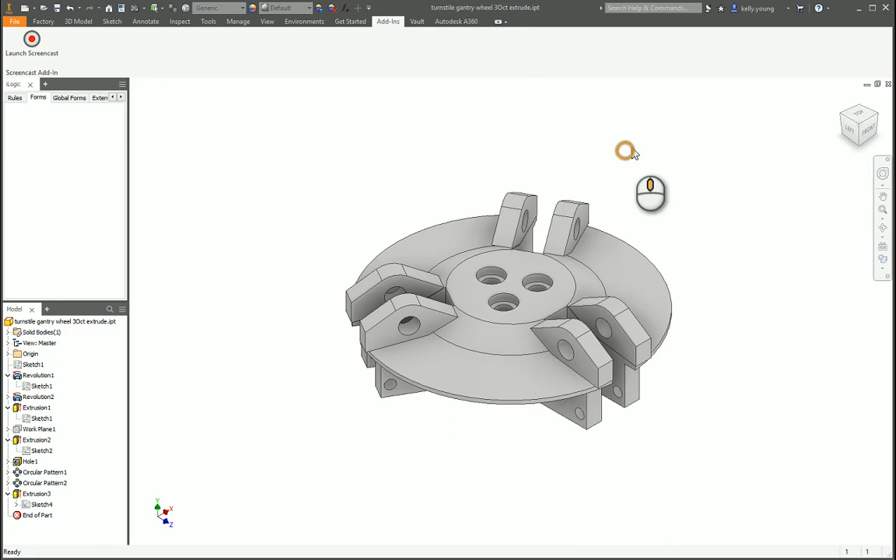First off, if we hit the home button, it's at a weird angle. So let's set it up so when we come to home, it's always set. Right click, set to current, fit to view. That way, if we're crazy over here, F6 brings us back out.

Alright, looks like we got a good start, but there's a couple things I noticed. First off, you did an extrusion on a curved face, so basically it doesn't line up right here. A couple issues with that. Another thing, looks like a couple sketches are unconstrained, like this one. Actually, it is fully constrained.

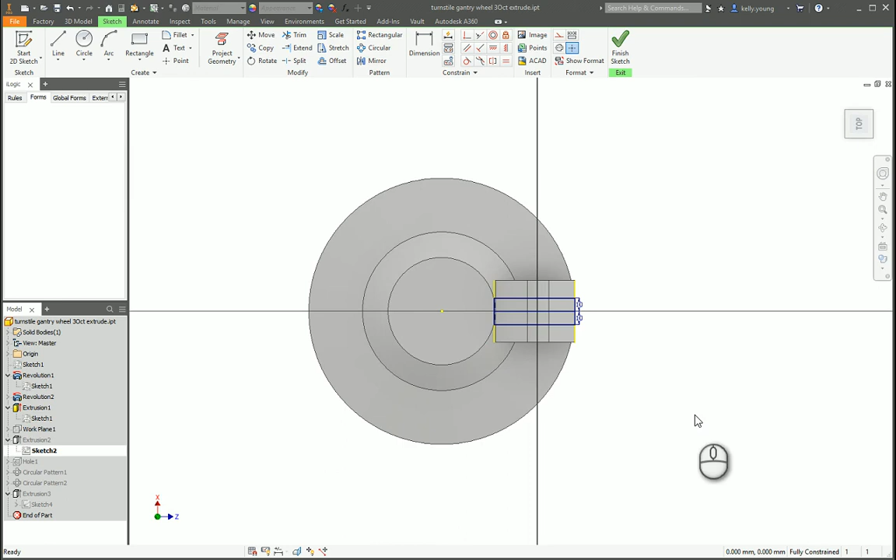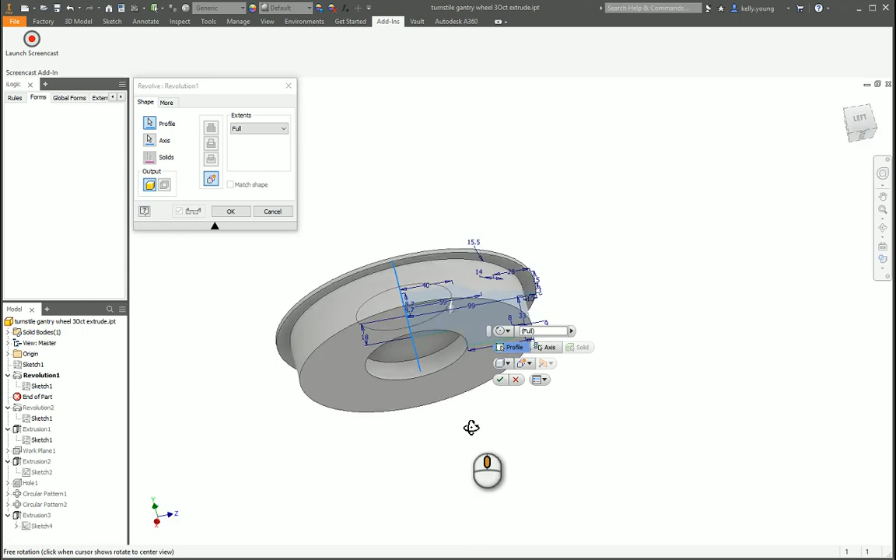I'm going to drag the end of the part up to here. First off, not sure why we're not extruding or revolving this one in this command as well. For instance, we're selecting this. We can select this profile and that profile as well, and get them all done at once rather than having multiple different things going on.

So if we drag this down, it'll give us an error, but then we can delete this one because we don't need it anymore. Okay, so coming down to here, that's really not what we're trying to do. So we're just going to delete that, and delete that one too.

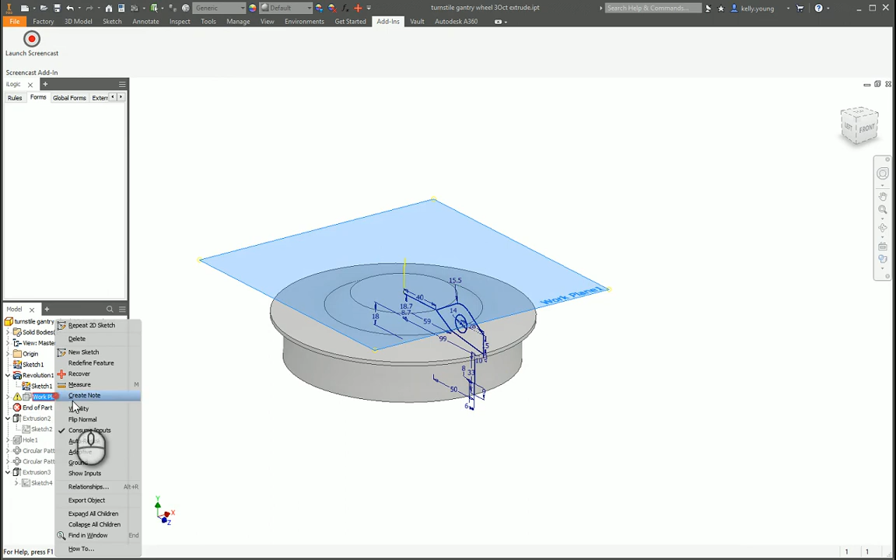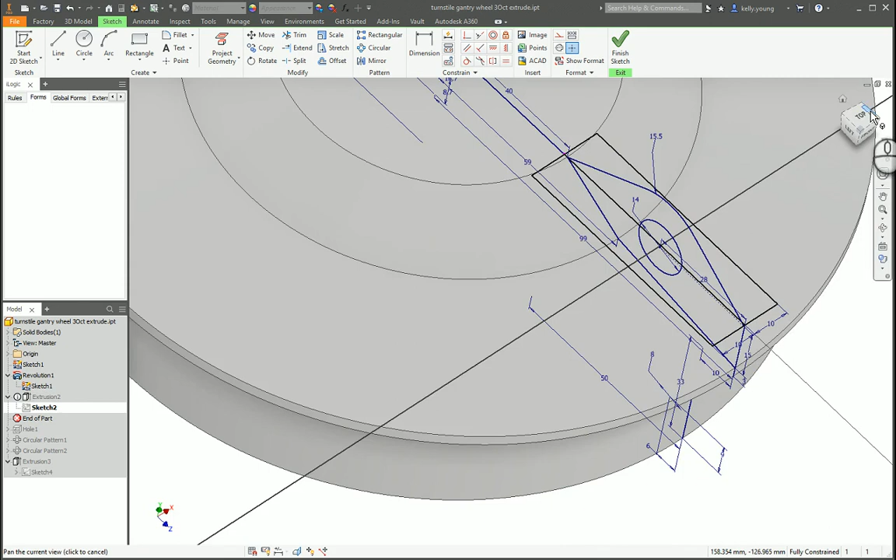Let's just go on. Okay, so we're going to redefine this to our top. So that's basically just cutting through here. Get rid of these. Okay, there's my point there.

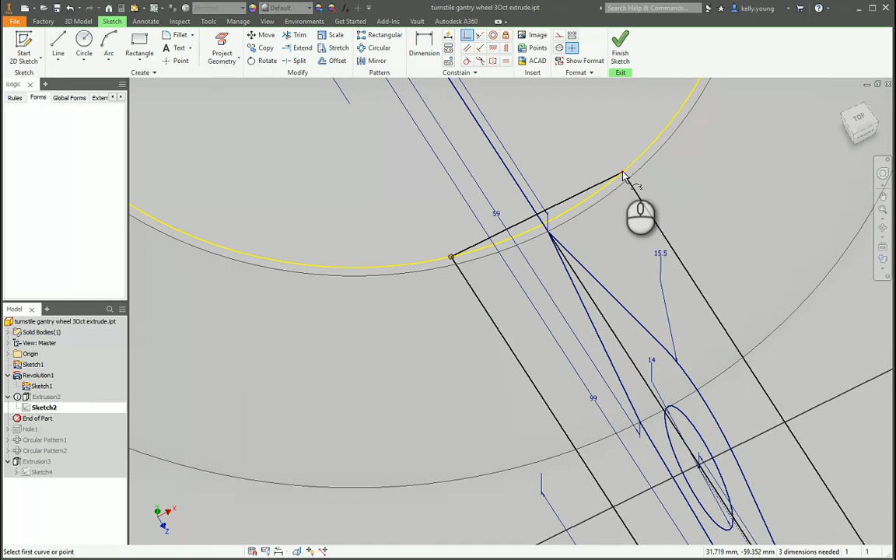So if we project the geometry, I believe it's the bottom one that we're actually wanting. Do a coincident constraint to here, to there, and they'll stick. Now this one comes up and down. Let's call these two in line.

Project the geometry of the outside edge. That point to here, fully constrained. Now you can notice that if it did cut, it would miss that little point, so it did it wrong. Instead, let's do a tangent constraint to the outside, so that way it'll cut all the way through.

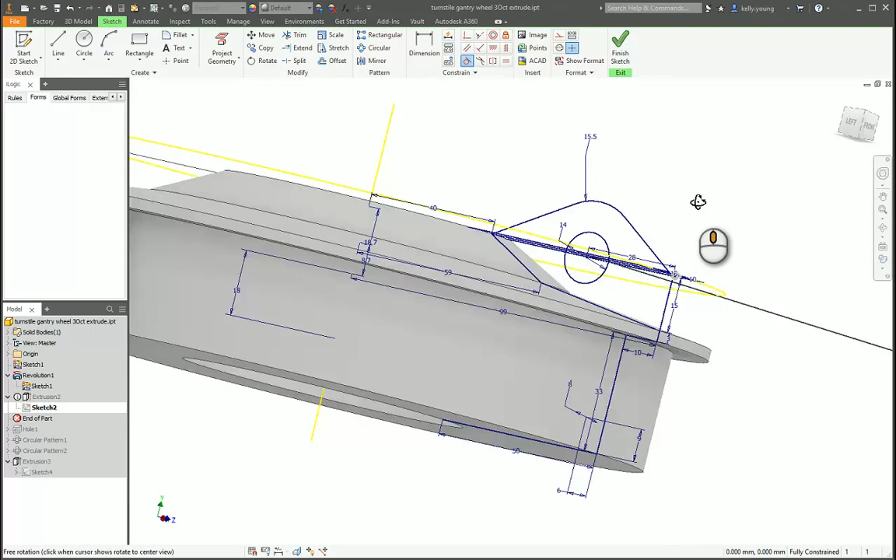Two random lines, make these parallel to each other, trim, make these two equal to each other, and whatever distance we want. Let's call that 12. I don't know what that is. But...

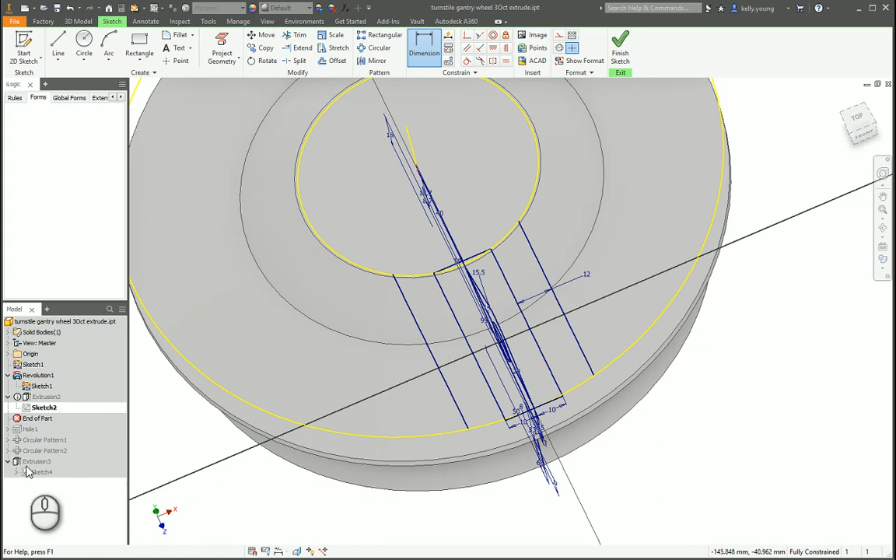So already I realized I did something wrong. Oh no, just kidding.

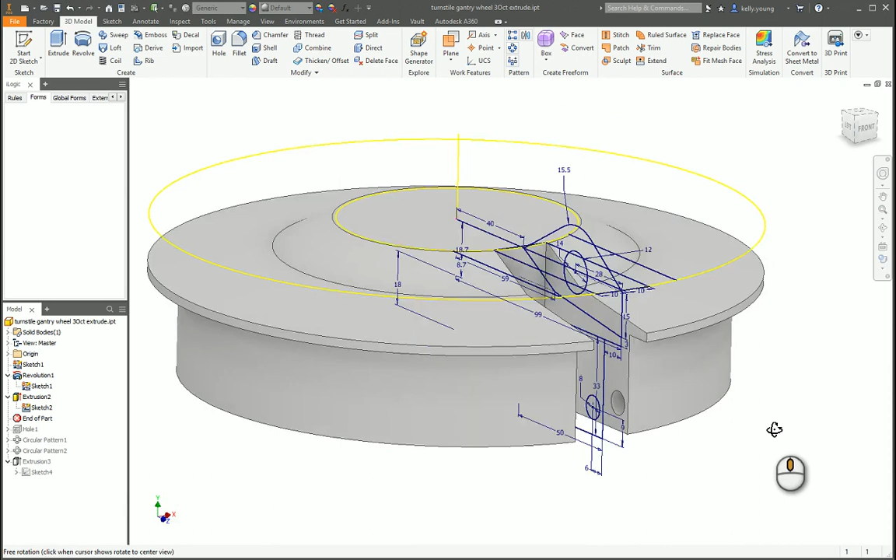So what we're going to do is turn on the visibility of this sketch. Make a plane on that line to this face, so basically it puts it at 90 degrees. If you wanted it flat, you could do it at 0, but we're going to do it at 90. We're going to make another one, same thing.

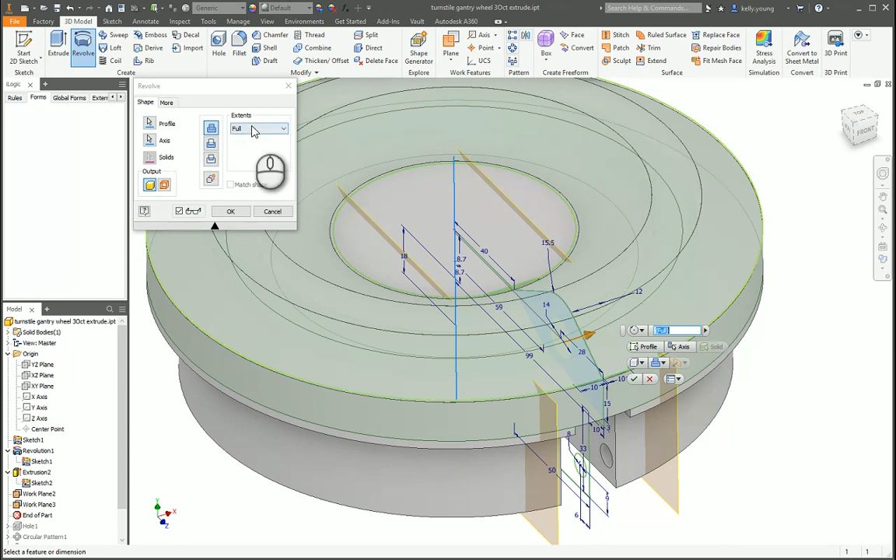So we can then revolve from this along the center line, or you can go to the origin and find the center line through there, but this will work. Between here and here, so it basically comes in between them.

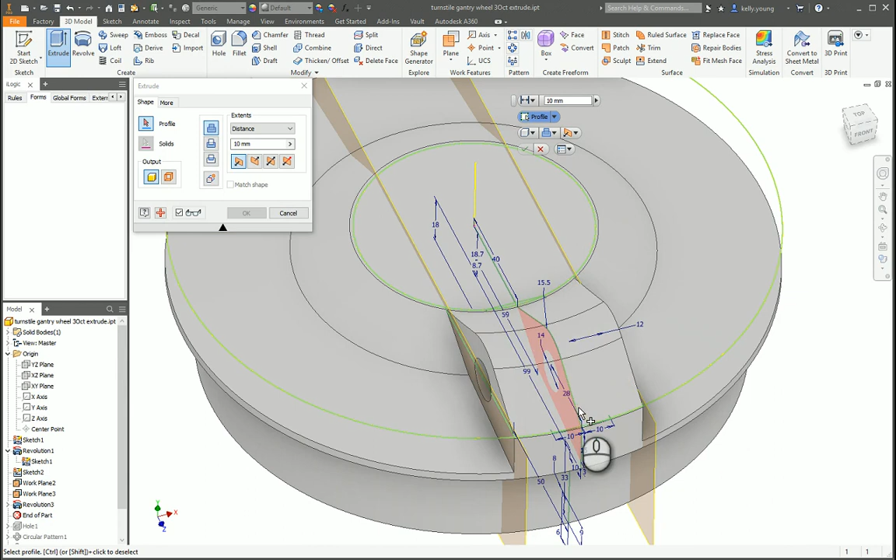Now this extrusion, delete that, because we can come back through and still... where are you? Right click, select other, and then you can basically go through. So I want that guy. Right click, select other, and that guy. I'll give you all the available options.

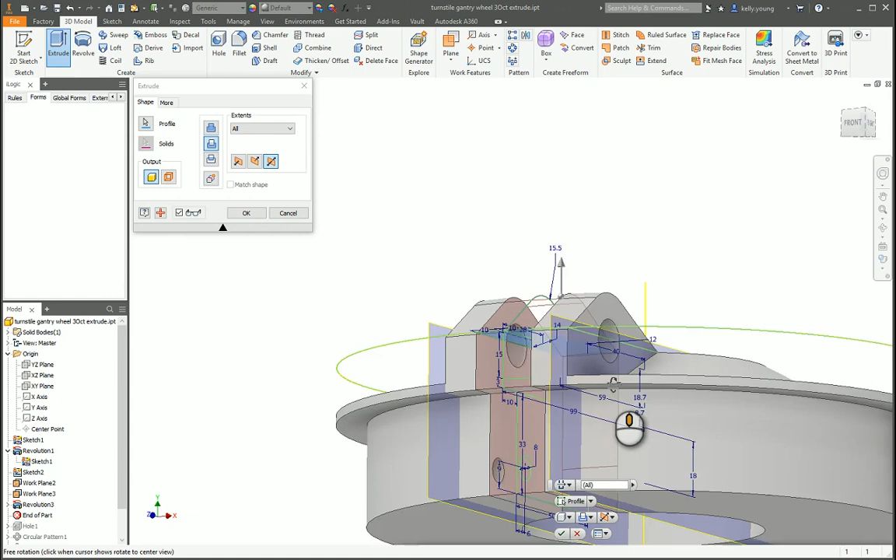Then we can come back through to our shaded with edges, cut, up and down, through all. Sometimes you'll have to select multiple solids if it didn't add it in, so that way it actually goes through on that curved face and stays on it.

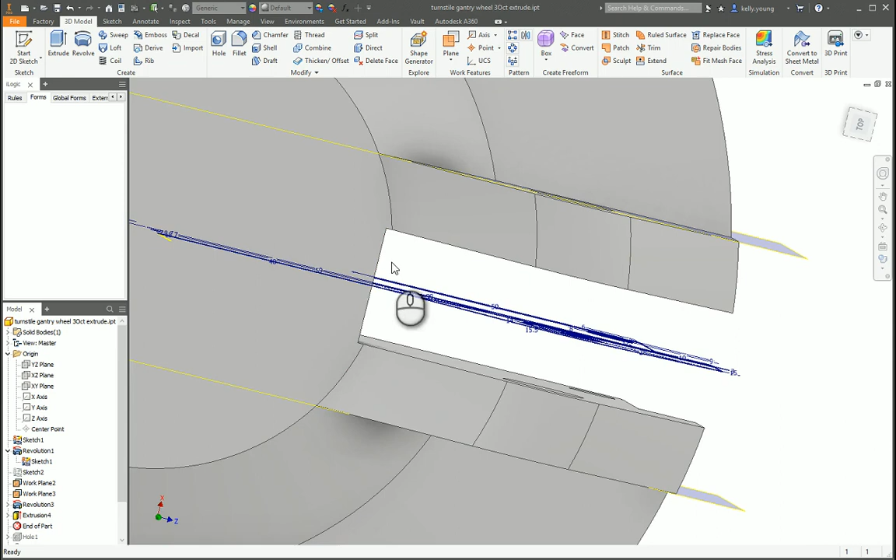Now, I don't know how you're manufacturing this thing, but the reason I kept it flat is so if you had an end mill and you came through and cut, it'd give you a flat surface. If you tried to come from the top and come this way, then you'd have a round edge from the top here, and that just really wouldn't work out very well. So that'll get you started as far as that goes.

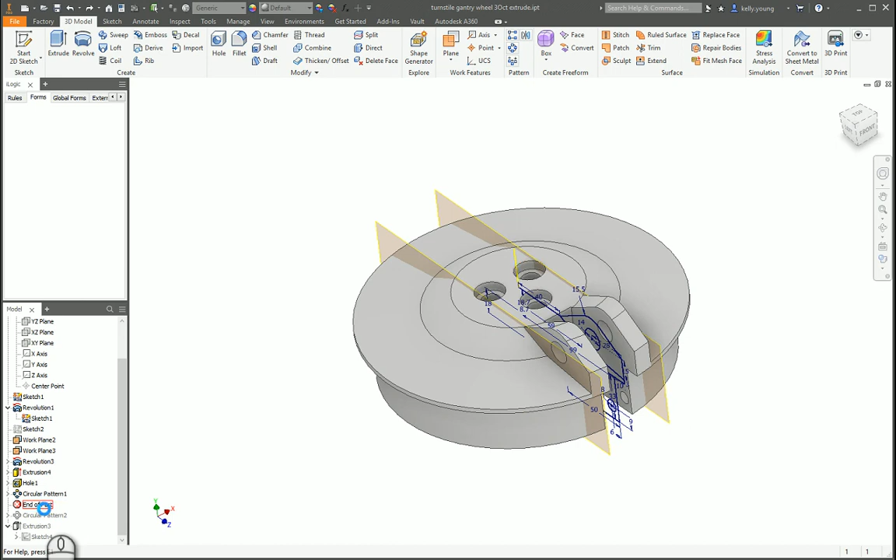Then you get your holes, and you get your circular pattern, which I don't know what this is. Probably the hole here. Oh, just kidding, this one is that and that.

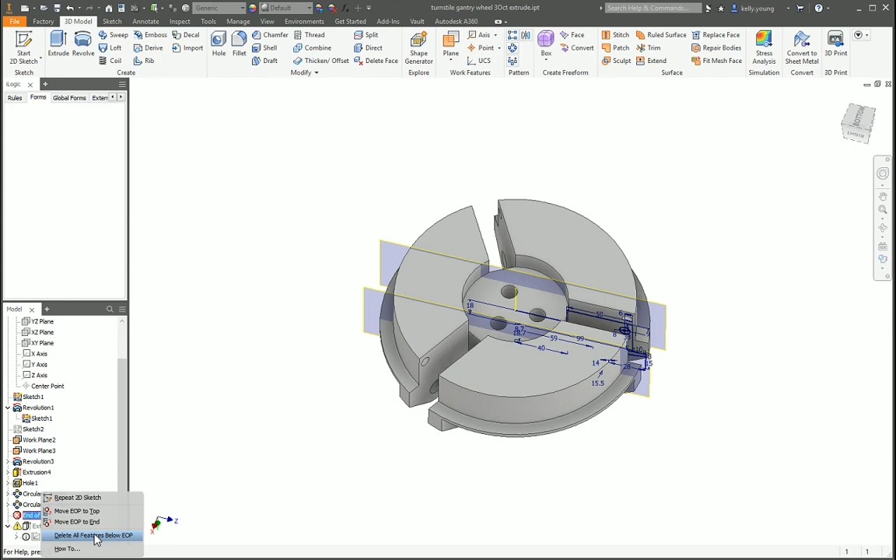Drag it to there, and let's see what you got going here. Okay, so I think that's kind of where we were before. So let's just delete that below the EOP. If you wanted to create a sketch on here, project the geometry.

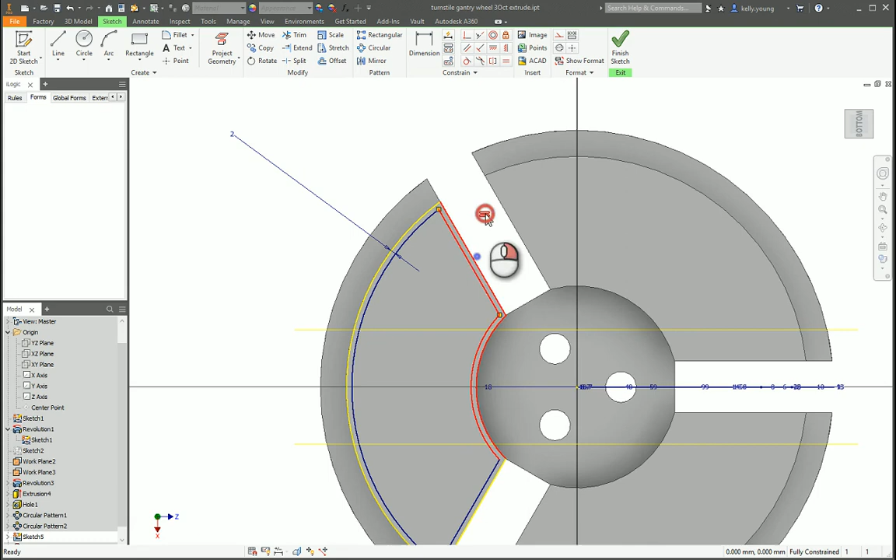Offset comes in, set dimension 6. I think that was 1. Yeah, let's call it 2. Notice how this is now fully constrained. You can click on this, delete that, and then you basically have freedom there.

5, same thing with this. Kind of see where - so that's this side, that side. That's the side that we want. Goes there. And that's this side here.